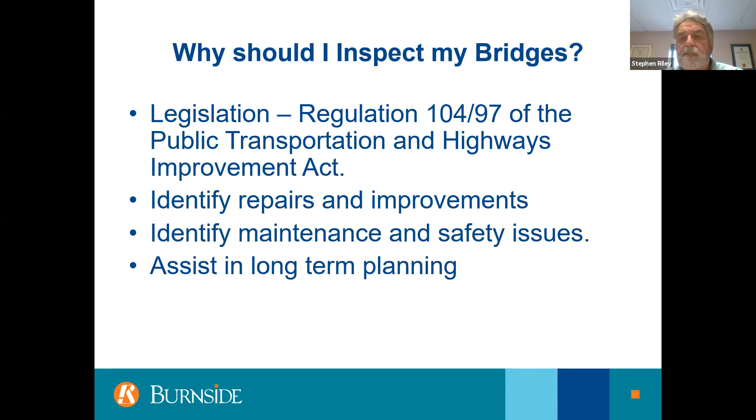So in terms of why you should inspect your bridges, first and foremost, the legislation, Regulation 104/97, says you have to. What it does is allow you to identify repairs and the need for any improvements you might be able to see. It identifies maintenance needs and critical safety issues, and it can assist you in long-term planning.

I often think about it in terms of when you buy a piece of equipment like a snowplow or a dump truck—how much money do you spend on that particular asset? It might cost you $200,000 or $300,000 for the truck, and then every week you're maintaining it: washing it, fueling it, doing oil changes, brakes, all sorts of maintenance. But then you have $30 million of bridge and culvert infrastructure, and how much money do you spend on maintenance on those assets? Most municipalities have a lot more value of bridge assets than they're probably aware of.

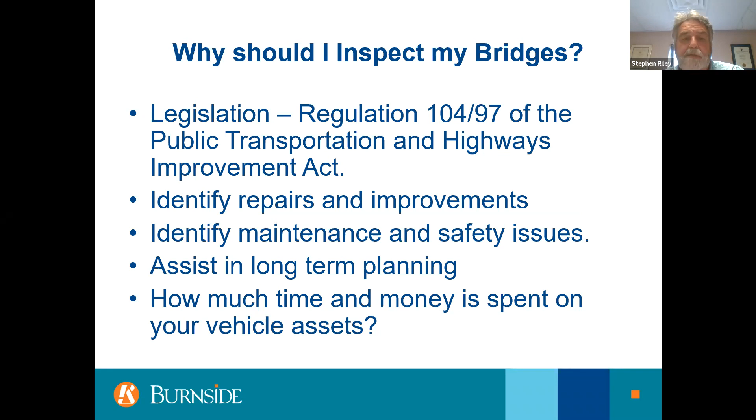So there's a regulation—everybody quick, hurry, read that. Just kidding. The most important part says that every bridge in the province has to be inspected for safety and integrity once every 2 calendar years. So that's kind of the driving force behind why you do it, and then it's about what else you can get out of this.

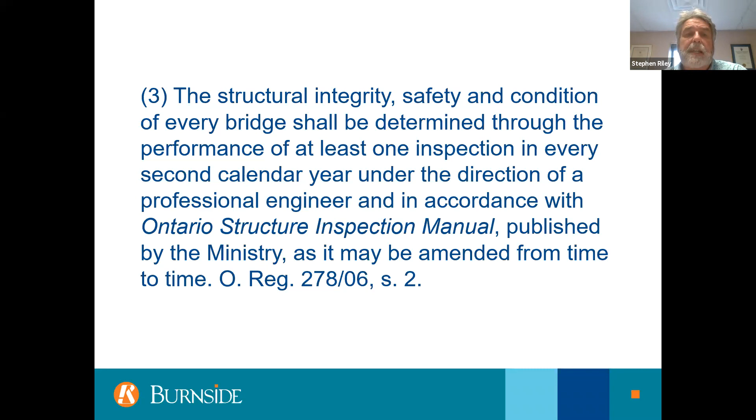So what formats are there? Well, if you're with the MTO, they have their bridge management system, BMS, and that's fundamentally the basis for a lot of other systems. It's a severity and extent criteria.

So what that means is that you look at a particular component and you see how severe certain defects might be. It might be light rust, for example. It might mean heavy pitting. It might mean holes, perforations in the steel. So there's a severity of a defect, and then it's to what extent on the component this defect is impacting.

There's also discussions in there of performance issues on your bridge. It might take the form of, does your bridge vibrate too much? Is there ongoing settlement? Is there other movement on the bridge that you need to be aware of? And then of course, there's an issue about maintenance, and there's a number of items described as maintenance, and you can try to take those up within a short period of time.

The OSIM is the Ontario Structure Inspection Manual, and that forms the backbone of most bridge inspections. It's based off of the MTO BMS. It's again the severity and extent criteria. Sometimes we see other municipal driven or consultant driven formats.

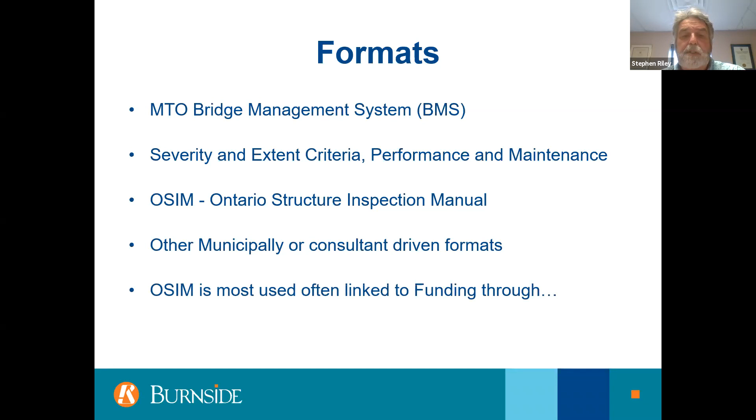Depends on the size of the municipality. They may have their own format, and also certain consultants have hybridized and simplified some of the OSIM information for some of their clients. Now, OSIM is the most often used system that's linked to funding, and this is often through the BCI or the Bridge Condition Index.

So when we speak about the Bridge Condition Index, we think about it that the conditions for a component of the bridge are either excellent, good, fair, or poor. And the BCI, you can do it by component, but the way I try to envision it is...

If you have a blank wall representing a component, if all of the wall is perfectly good or excellent shape, then you get a high BCI. As you start to have a defect that might be, say, the size of a window, you might drop to good or fair condition, and then your BCI goes down as the size of the window gets larger. If the size of the window gets to be the size of a door, you're down into fair or poor, and your BCI declines respectively. So the larger the defect as a percentage of the component, the lower your BCI score goes.

Now, it's weighted by the relative value of the component. So you don't want everything weighted equally. If you have a damaged handrail on a bridge, for example, and its BCI is very low, you don't want that driving the whole score for the bridge. So it's a very lowly ranked weight in the BCI.

But if that same bridge had problems in low BCI based on a girder, for example, well, it's certainly a much more involved repair or replacement process. And so its weight in the overall calculation of the BCI is much higher.

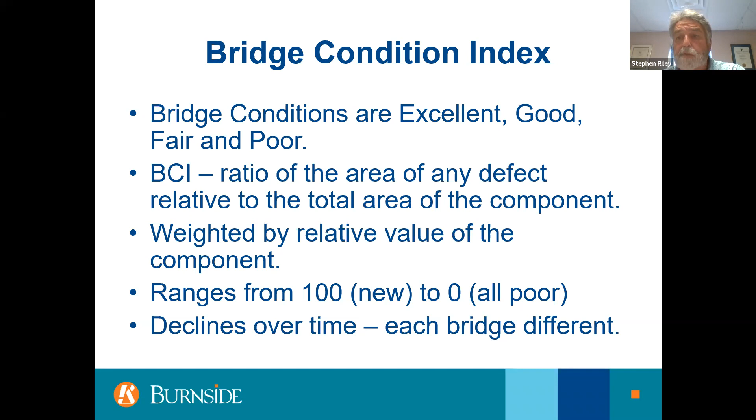So what do we do with the BCI once we get it? Well, first of all, it's important to know that the OSIM inspections provide you all the information to calculate the BCI. And so once you have your system of bridges inspected, you'll be able to prioritize your bridges - the lowest BCI might need the most attention, and of course the highest needs the least attention.

And then I have to stress this many times: it's not a single point where you can just look at your BCI and say, I'm going to do project A first. This is only one input into the planning decision that might go into a bridge rehabilitation or replacement, but it's a good place to start.

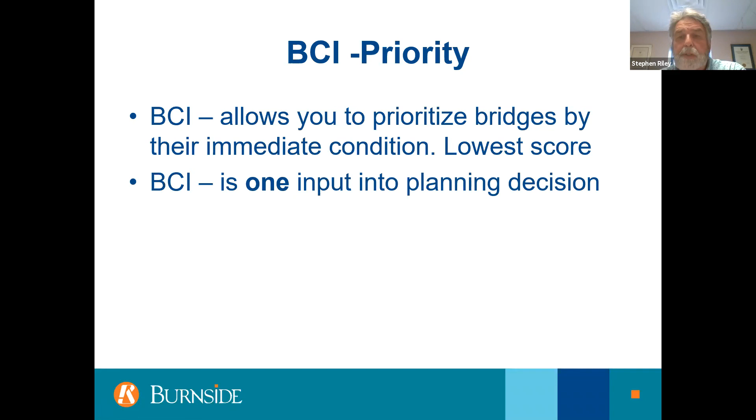The other things you have to think about are the traffic volume, the road geometry, load limits, future growth, and history of accidents. All these things have to be considered in addition to bridge priority BCI number. For example, if your lowest BCI bridge is on a very low volume road, you might want to prioritize a bridge that has a higher BCI for replacement if it was to be on a road that has more traffic, or potentially more traffic due to future development.

BCI is important, but it is only one input into the planning decisions. This comes down to things such as functional versus structural adequacy. The BCI tells us about structural adequacy, but sometimes, as we recently did, we replaced what was a single lane bridge due to construction of a manufacturing facility that was going to drive a lot more traffic. A lot of people in the local area started using that road, and that bridge needed to be replaced even though it was probably 10th or 12th on the list in terms of BCI. It was taken to number one because it was functionally inadequate rather than structurally inadequate. Again, BCI is just one priority in our planning decisions, and I always want to stress that point.

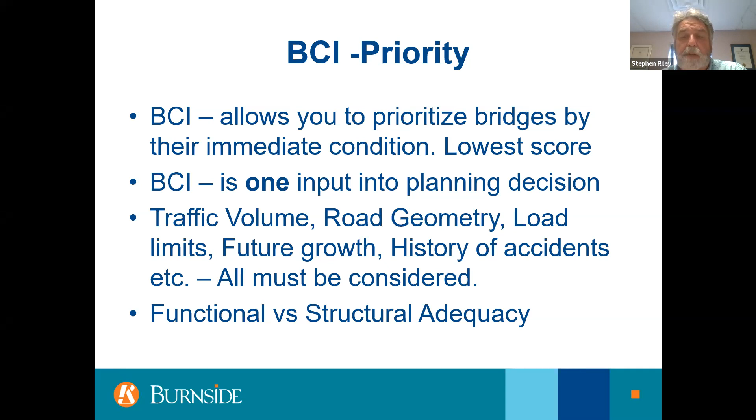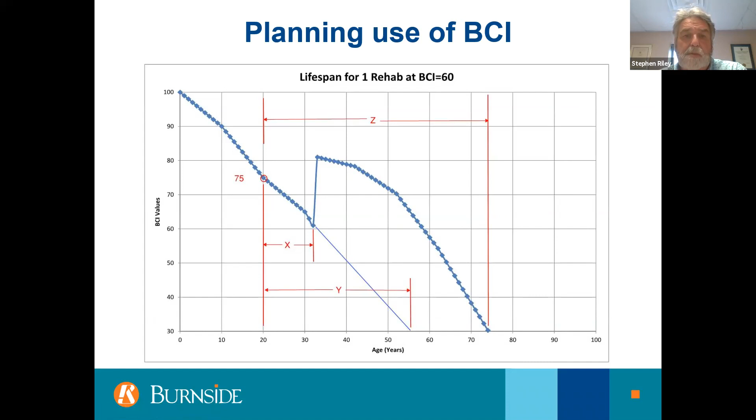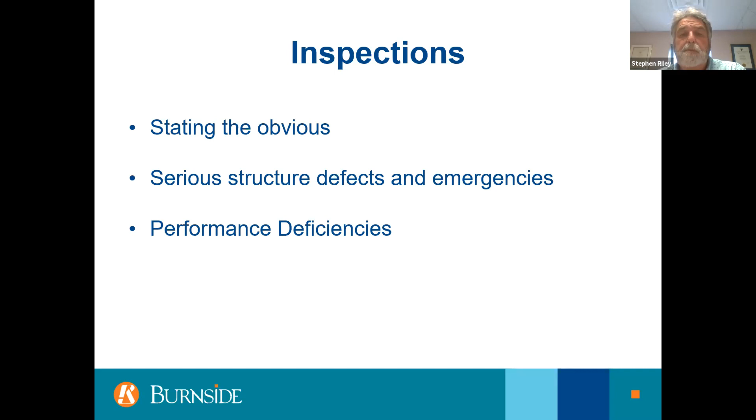So when we get into inspections themselves, what are we looking for? There will be things that are clearly obvious, serious structural defects and potential emergencies that might require the road to be closed, and I've closed several bridges due to this. We might find performance deficiencies where bridges aren't able to expand and contract, or react to temperatures as they're supposed to, where their movement is restricted. We might identify repair or replacement needs for components or the bridge in its entirety. Then we come to maintenance, whether we can do this in-house or go out to contract.

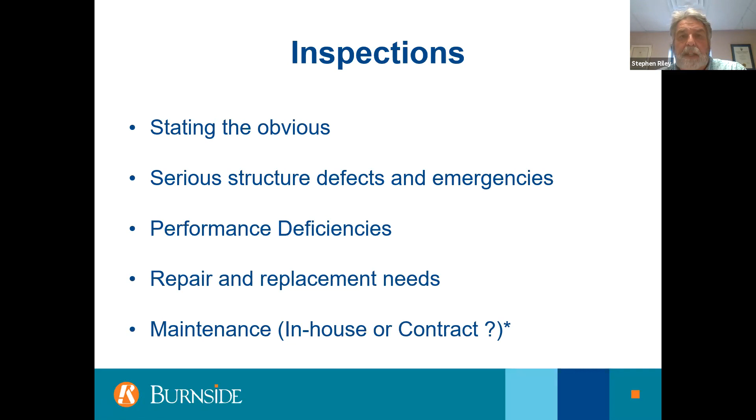Now I'm going to take a sideline here and talk about that, because it's come up recently with some of our clients who wanted to develop a system where their own operations folks would go through and do all of their bridge maintenance that's identified in their OSIM reports.

We were hired to look at their existing OSIM reports that we didn't do, and just go through the maintenance needs that have been identified. Then we sat down with their operational staff and asked which of these things they could do. It was kind of an eye-opener for the maintenance staff and operations folks, because a lot of the things flagged in some OSIM reports are beyond the capabilities of most municipalities.

We have to remember this was originally created by the MTO. So when you start to look at the listings of things identified as maintenance in a typical OSIM form, you start to eliminate some of them pretty quickly, like lift and swing bridge maintenance, which has a very limited application.

Bridge cleaning, you can certainly do that with your own staff. And if you walk away today with anything, you're going to hear me say the word clean your bridges a million times. Handrail maintenance—you may be able to replace tube rails with your own staff.

Most municipalities are not in the business of painting their steel structures, nor doing deck joint repair other than flushing them out. Very few people are capable of bearing maintenance, structural steel repairs, or concrete repairs.

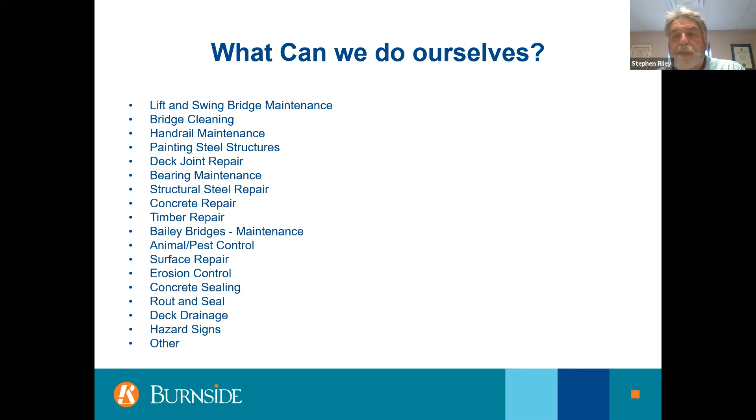When we went through that list with this particular municipality—a medium-sized city in the province—they realized they really were not cut out to do a lot of what is described in OSIM as maintenance. So they had to recalibrate how they were going to do that, what they could do in-house, and decide what they had to contract out.

So when we get back to the inspections themselves, you're going to see some photographs here that I've collected through the years of things that you just shake your head at when you see them. I don't use any municipal names, just in case anybody is listening. But this is one of those pictures that falls into the category of stating the obvious.

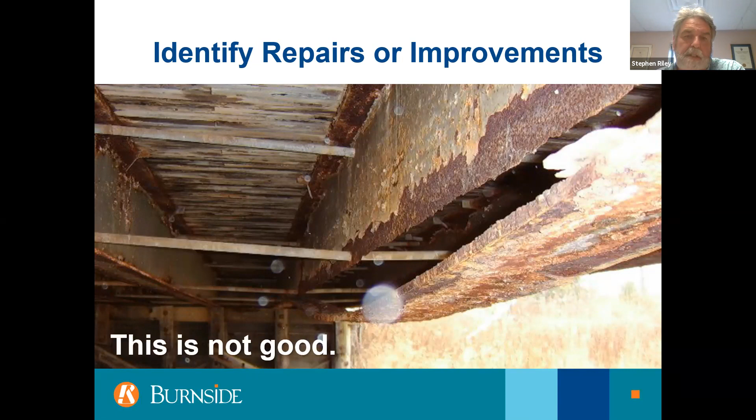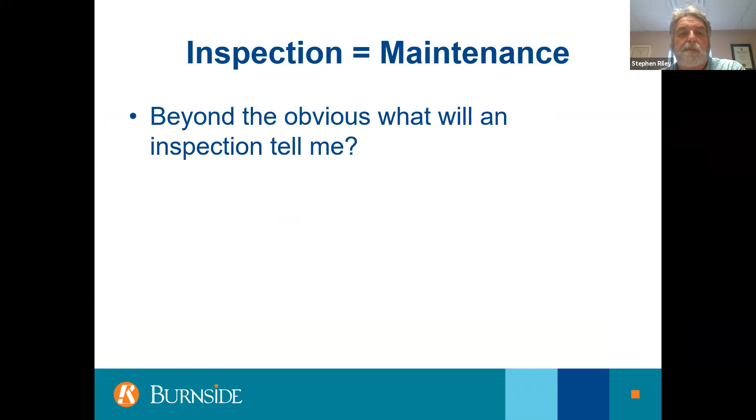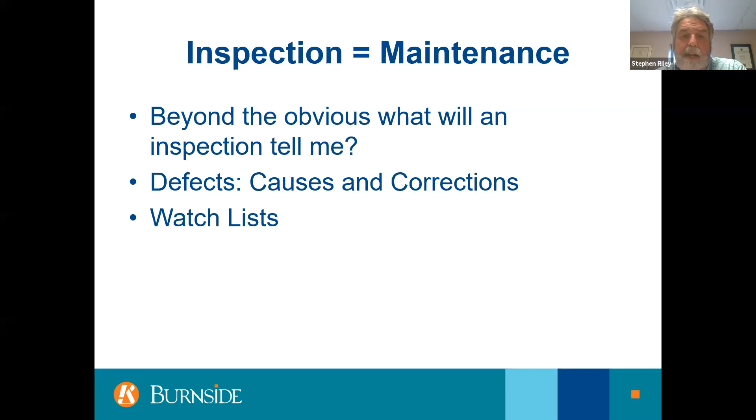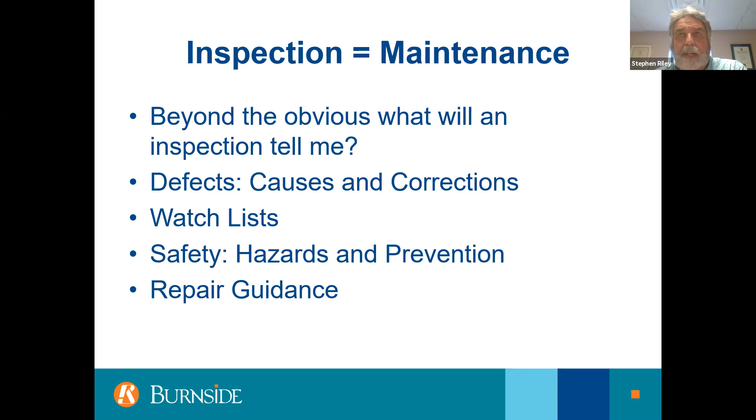So beyond the obvious—those kinds of obvious defects where you have large holes or major structural concerns—what else can this tell us? Well, we can find some discussion about what causes some of the defects and what we can do to correct them in the short term. We can create watch lists, things to keep an eye on to see whether they're getting worse, and if so, how quickly. We can identify immediate safety hazards and take steps to prevent certain issues, and we'll touch on that. We can also start to think about repair guidance, where you might engage someone like myself or other consultants to give guidance on how to repair or do work on your bridges.

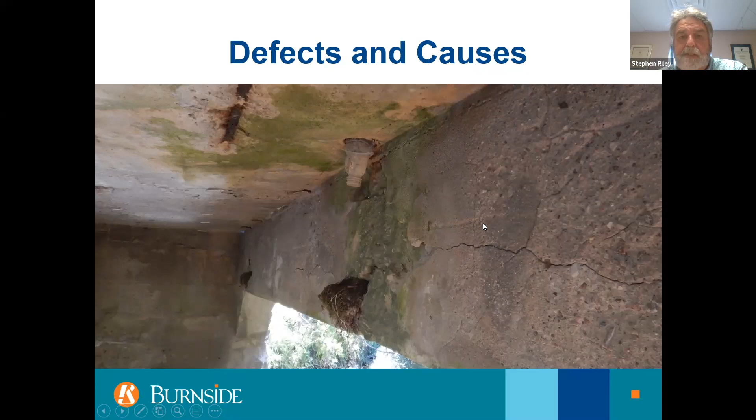And when you have a situation like this, where you've also got low cover to your reinforcing steel, you start to get damage to your soffit and damage to your T-beam concrete beam on the inside face. This is so common—I see this thousands of times.

Just about every concrete T-beam has the same problems to some extent: soffit and beam damage. The solution here is you can extend the drain, take a steel spout and extend it down below the bottom of the girder so that the drainage water cannot get on your concrete components. This one's probably a little late for that, but if you catch it, you can do this.

And it's not just always the case with T-beams. It's any kind of structure that has no drain system that gets below the closest beam.

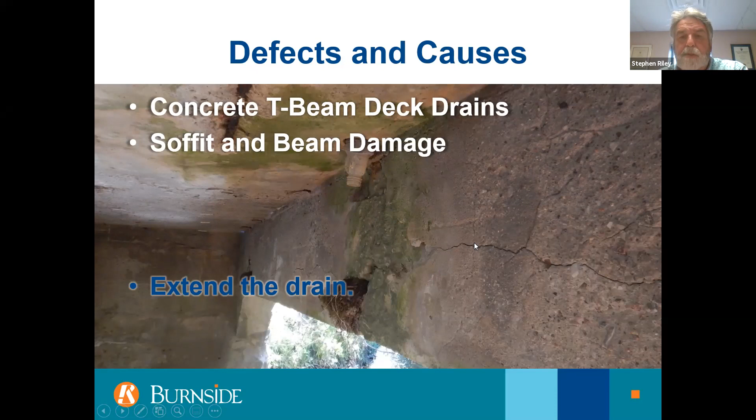This is an old steel truss bridge, and obviously there's a buildup of sand and debris over time. A lot of these things were built with angles for tension members that almost act like a cup to hold all this stuff, the sand and debris built up. And of course, if there's sand and salt, you get water and salt in there, you're going to have corrosion of the gusset plates, corrosion of the tension anchors, corrosion of the inside girders, just a lot of corrosion that comes along with having this material build up on your bridge.

I didn't find the picture, but I did come across a steel truss a few years ago that had about a 1.5 inch diameter, I'll call it almost a tree, a bush growing in it. It certainly didn't pop up overnight, it took some time for that to grow. And it was obviously clear that they were not maintaining that bridge.

This particular bridge had to be closed on an emergency basis, and it was immediately repaired so that it could be open for school buses and such. Then it was immediately planned for replacement. Keep in mind that happened in about 1996 that we built the new bridge there. Sorry for the old picture, but it tells the story. In 1996, this bridge ultimately was replaced.

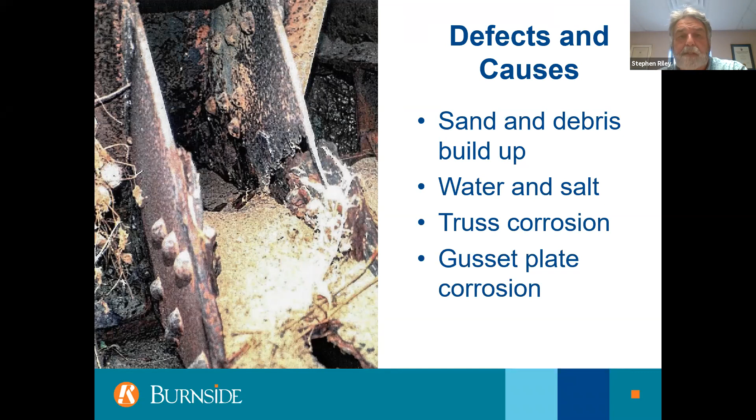This bridge is the same vintage as the one you just saw, but in this municipality, every single year the road superintendent went out and washed the bridge. He usually used the fire department, so I don't know whether everybody can do that or not. And later started hiring a bridge contractor to flush the bridges. But they went out and washed their bridge every single year. This bridge was built around the same time as the one we just saw a picture of.

And I can tell you that this bridge was replaced in 2016. So an additional 20 years of service life was gained simply by washing this bridge. When this bridge was replaced, its BCI was still almost 60. It was basically that they had more traffic volume on the road, and the bridge was becoming functionally inadequate as much as it was structurally inadequate. Rather than spending money on repairs, they elected to replace it. But that's 20 extra years of service life just by washing the bridge.

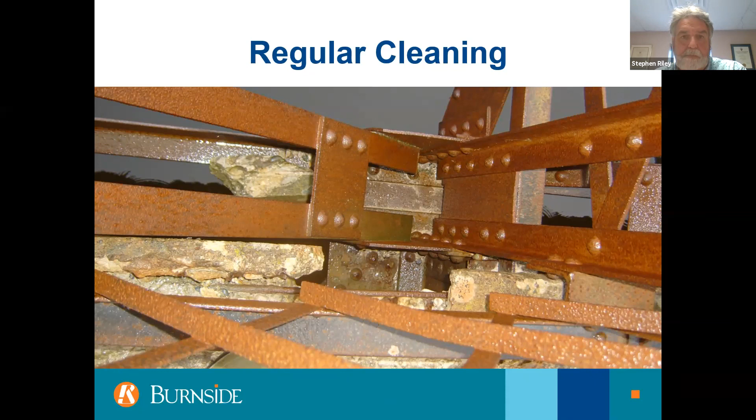Another common situation is expansion joints. The idea of expansion joints is exactly as it is, expanding. As the weather gets hot, the bridge wants to get longer, it wants to move back and forth with the joint. When the joint is full of debris like this, sand and debris, it basically can't move, and now it's adding stresses into the bridge that it wasn't designed for. This stuff, if it stays for too long, becomes almost like concrete, and so it stops the bridge from moving as intended.

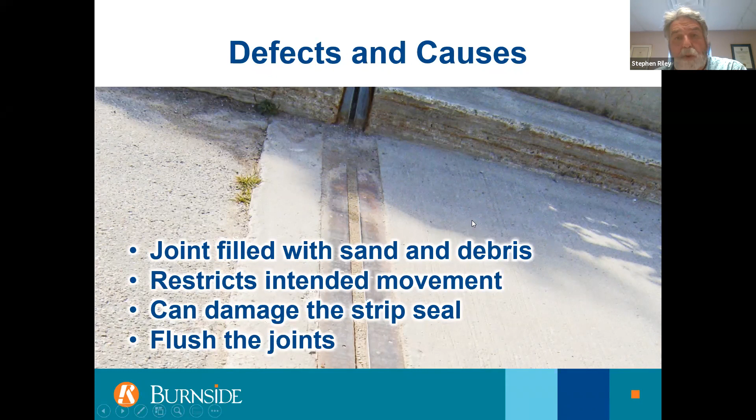You need to make sure you're cleaning this, because a lot of these joints have a rubber seal in them, and you'll damage the seal, which can cause leaking. So again, I'm back to my cleaning discussion. You need to flush those joints and do it every year. Again, it buys you service life, and it's easy to do.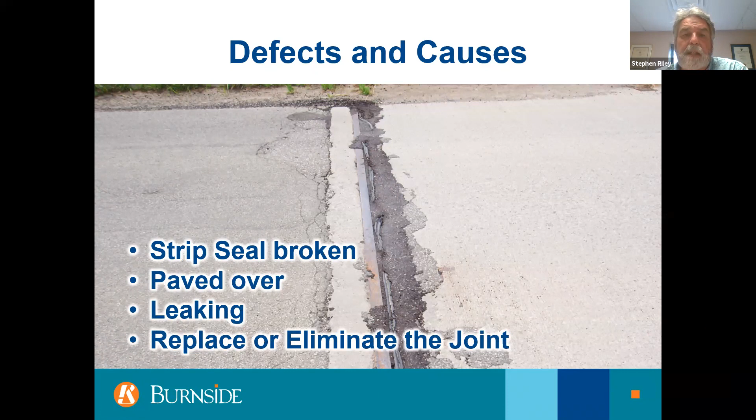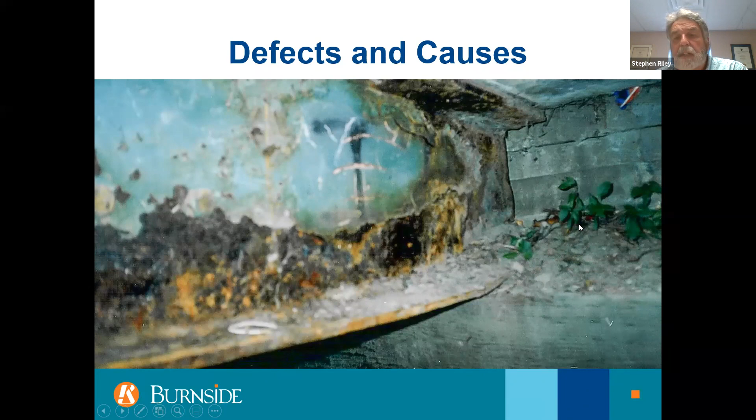Now, if you go underneath the bridge, you'll see something like this, where the joint has been leaking, and there's a lot of sand and debris that builds up on the beam seat and on the bottom flange of the girders. Of course, along with it comes the salt and water, and you start to get corrosion along here. You can see some greenery that has taken root there, because the water is getting watered every time it rains, and there's all that dirt to grow in. This was not a planter that was planned for this location.

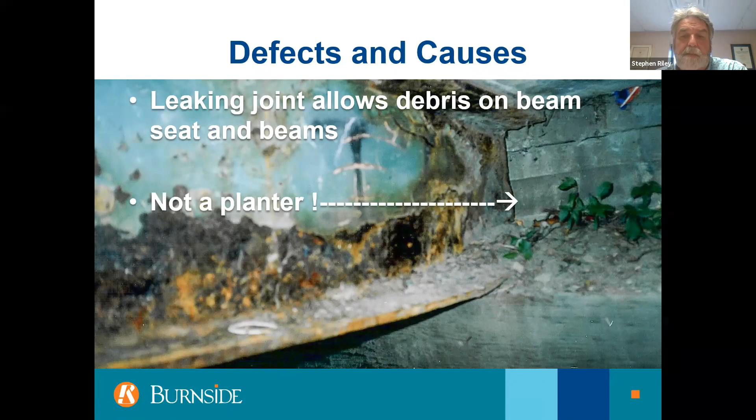So again, here's another place where you can clean the beam seats, clean those areas, don't let material build up. This is something easy that you can do with your own staff.

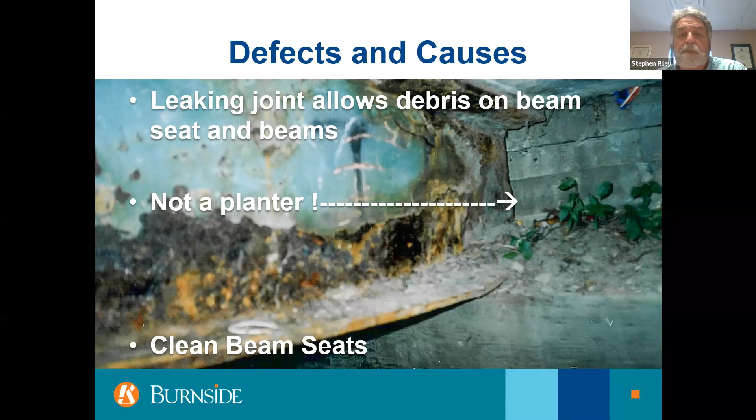When we talk about watch lists, hazards, and prevention, in this case we want to find areas that we can monitor and see how they're performing over time. We can consider areas for future construction or maintenance, start to identify them in advance, and take action before you have a problem.

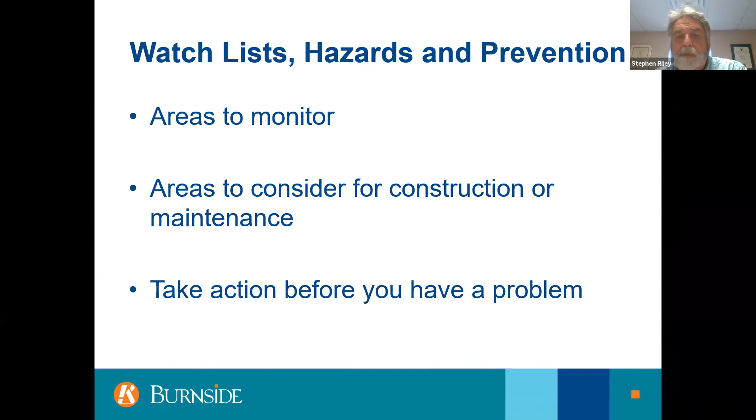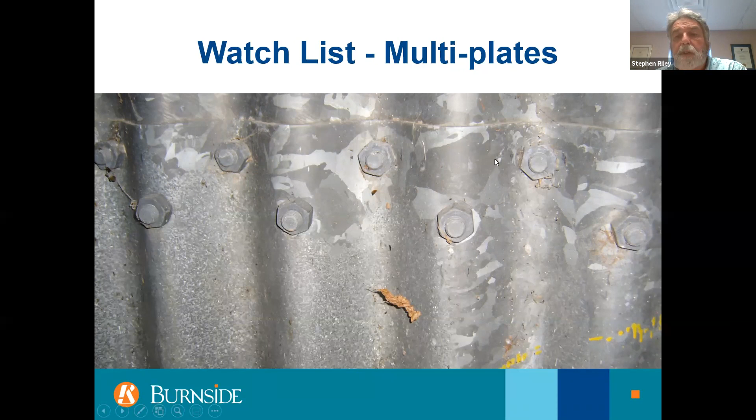So one of my favorites is multiplate pipes. Multiplate pipes are pretty common all through the province, and there was a time where many pipe arches, CSPAs, were put in. There's always, I can almost tell you in advance what the problem is going to be when I walk inside. I have a mantra when I send out my staff to monitor construction of these or inspection.

There's two things I tell them. One is the bolt hole closest to the visible edge should be in the valley of the corrugation. So you can see here, there's the visible edge, there's the bolt closest. Further away are the bolts that are on the crest of the corrugation. Now, this would be true whether you're looking at it from the inside or the outside.

The other thing I tell people is, if it's going together easy, it's going together wrong. The way these are installed typically is you have a crane holding up the panel, and one end rests on the outside of the lower plate that's already in place, so you can just tighten the bolts up. But the way the plates are manufactured, on the other side of the culvert, to have this arrangement, you have to have the plate on the inside of the lower plate. That means you have to push it and hold it in place, so you need an extra person. So again, if it's going together easy, it's going together wrong.

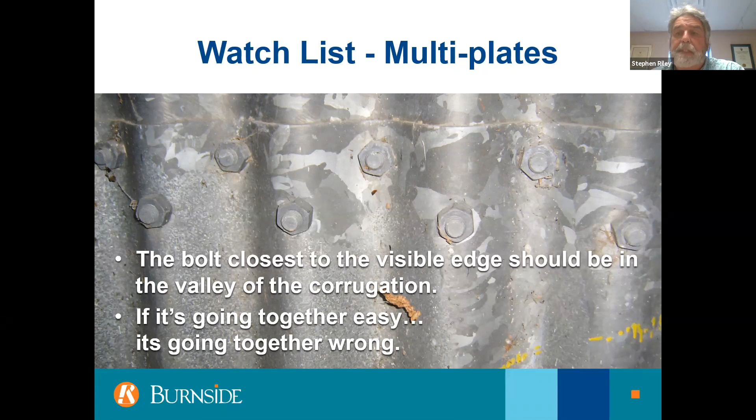They found after some time that it's the way the plates are arranged, it's a weaker design in this factor. It also depends so much on the quality of the backfill and how well it's compacted. You'll notice these things are called soil steel structures - the soil is a critical component, and the backfilling of these structures is very, very critical. It's more critical the sharper your radius. So a round pipe isn't as much of a concern as an ellipse, which isn't as much concern as a pipe arch, which is where the majority of these are - where you have the high radiuses, poor compaction, and you get this kind of cracking. It's very common, and again, the shape of the structure will dictate this. The pipe arches are by far the worst.

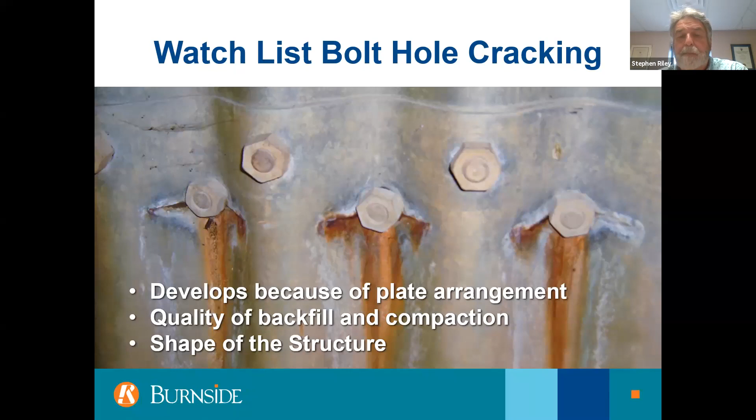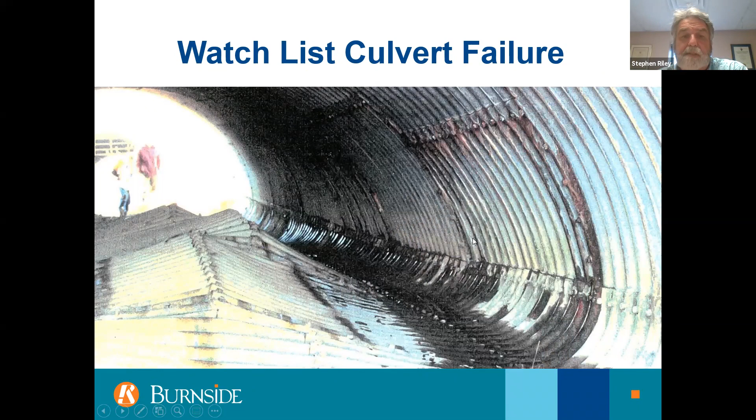Here's an example of a culvert failure that is a bit of everything. There was bolt hole cracking, there were no head walls at either end, and the water was going underneath the culvert, washing out all the support, and it just buckled right up like this. Of course, it had to be replaced.

Sometimes if you catch it, you can do a temporary repair. Here's a situation where there was some reinforcing steel that was welded alongside each of those cracks to sort of replicate the steel that was missing. It's a temporary repair, but this particular one bought that municipality 20 more years of service life. So rather than spend the money right away, they were able to extend the life of that culvert.

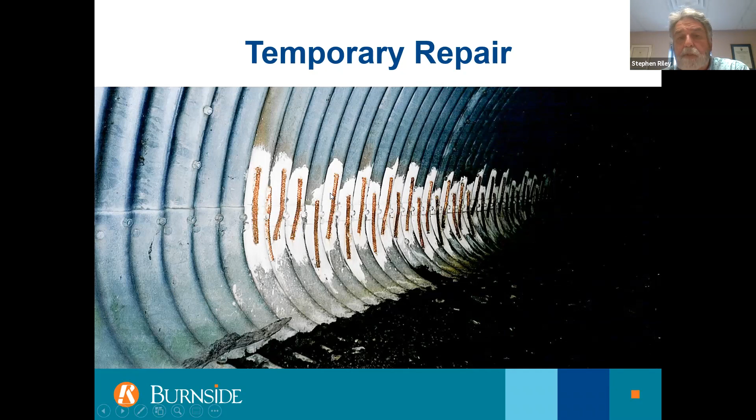Now, it certainly has safety concerns - you're welding in an enclosed space with galvanizing. It takes specialized equipment and such to do it, but this is a temporary repair that's fairly inexpensive that can buy you some time. If the structure's under a lot of fill, it's going to cost a lot of money to replace.

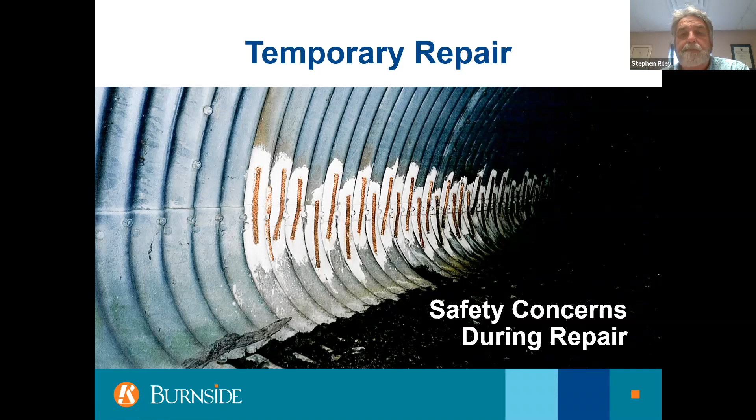Other things to watch for are ever-growing potholes in places. Here you have a pothole on the approach to a bridge that's requiring constant maintenance. The pothole grows over time. Every spring your road superintendent comes in and says this pothole's getting bigger and bigger. So what might be happening?

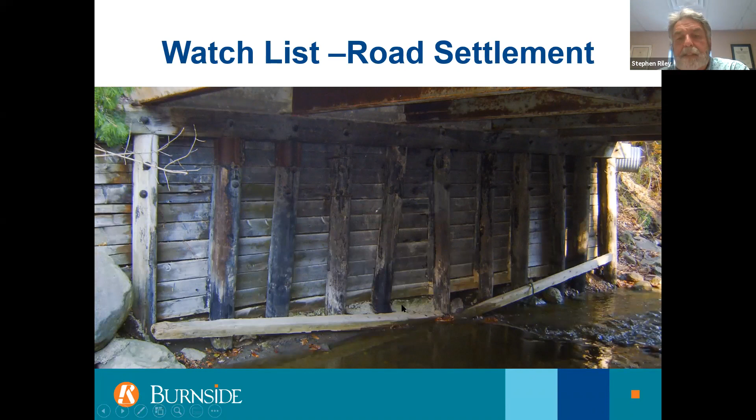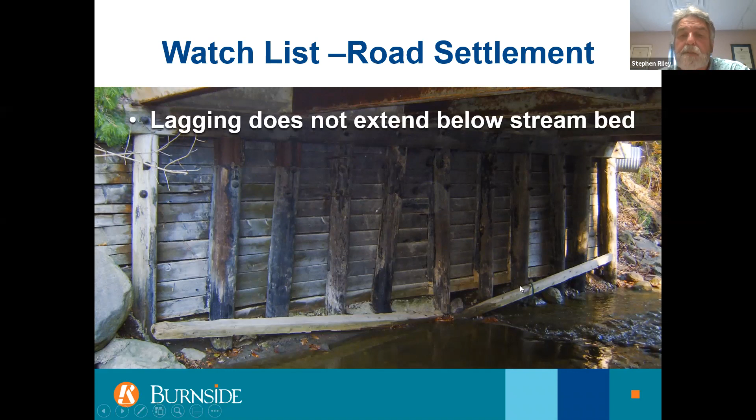In this particular case, it was a structure founded on a pile and lagging foundation system, and the lagging doesn't go below the stream bed. So every year, when the water is rushing through there, it's drawing material out from underneath the lagging and taking it away. And of course, if it goes from the bottom, it sinks in the top.

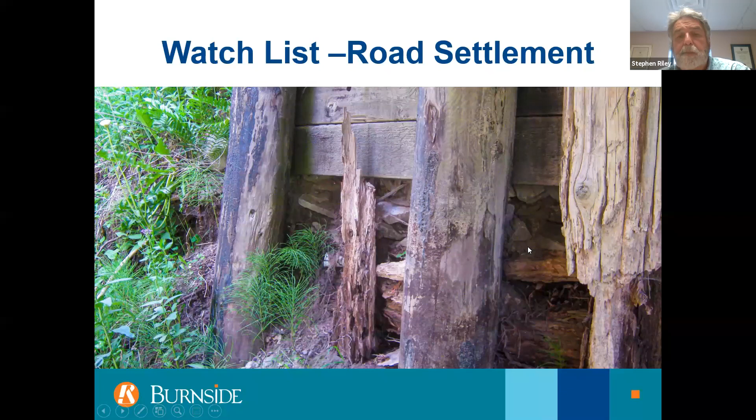But here you can see again, stream water is taking away the granular material. Over time, they've tried filling it with larger stones. There's another photo showing where they threw a road sign into the hole at one point. With a gravel road it's less obvious, but this kind of thing should come out in your bridge inspection.

In this case, it was time to rebuild that abutment.

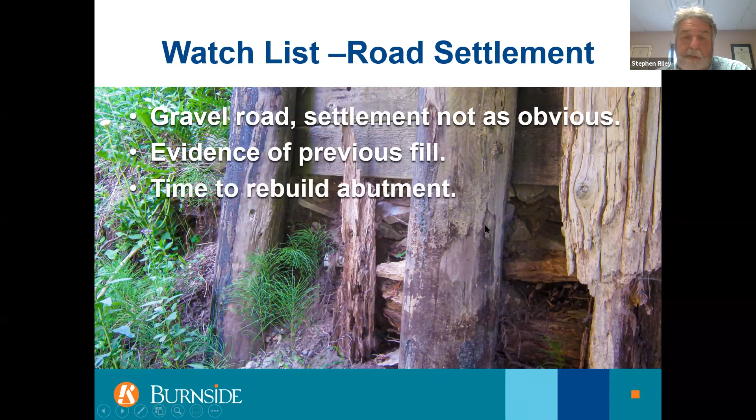Another thing is watching your culverts or structures for buildup of debris in the stream. Obviously this is a problem because it affects the hydraulics, and if you had a really big storm, you're at a greater risk of a complete washout if your structure's partially or fully obstructed. So you need to make sure you can clear that, and this is something you could likely do with your own staff rather than contract it out.

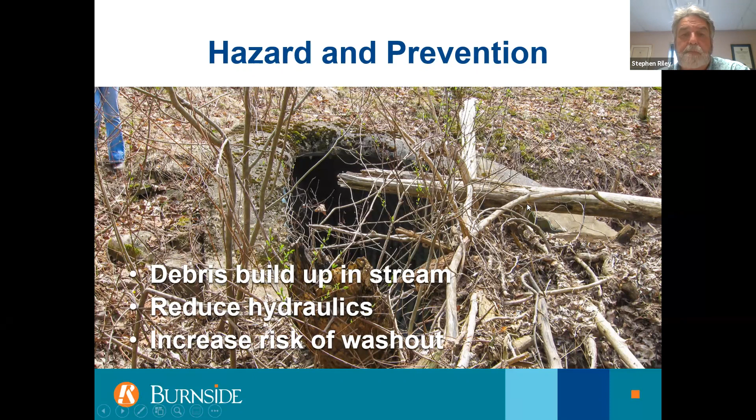Here's a common situation on a granular road where every year they've graded the road, and graded the road, and the road surface is up here now. This concrete is a barrier that used to be about 1.5 feet above the top of the bridge deck, and they just kept grading it and grading it.

They didn't really realize they were burying the barrier system until we got out there and looked at it and said, what is your barrier system? It's under the ground, it's under the road. So we recommended they don't grade anymore.

The best way to fix that is to remove the fill and pave the bridge and the approaches so you're not likely to grade over top of it. This is pretty common, and it happens so gradually that nobody really notices they're filling in parts of their barrier system. Then there are places where it is very noticeable, where someone's built up the road approach with sandbags because they see themselves doing what they shouldn't be doing. But this is a case where it is sometimes noticed and they just do it anyway.

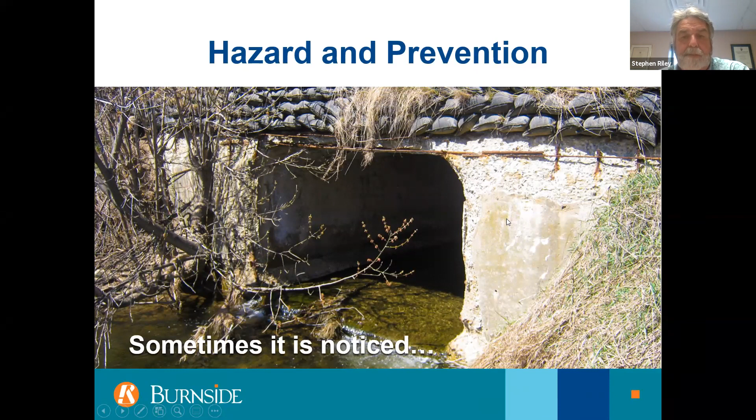This is an example of a real safety hazard. In this case, the guide rail is not connected to the structure. When you connect a guide rail to a structure, you're making a transition from a flexible guide rail system that in normal applications can deflect about a meter, which is what they expect.

With most bridges, as you get closer to the bridge, they add more posts. What they're doing is adding stiffness to that assembly, making it less and less able to deflect, because the concrete isn't going to deflect at all. So they want to transition from a flexible system on the approach that guides you back onto the road, making it stiffer as you come to the bridge and connect it. The idea is to slowly, gradually increase the stiffness so it won't deflect.

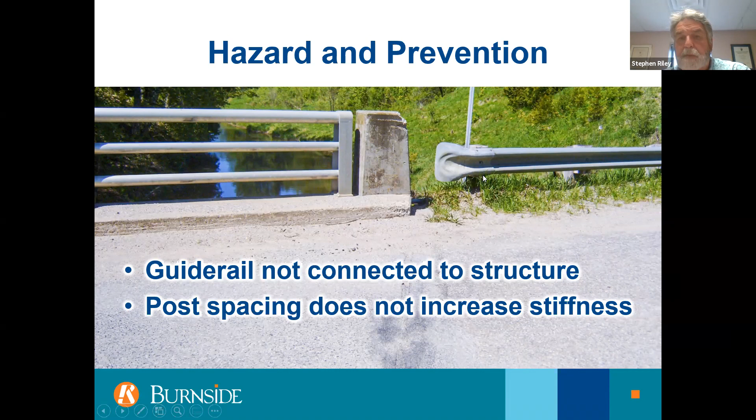In this particular application, you have a system that can deflect up to a meter. So if you hit this and you're a meter off the road, you're going to hit this post. In this case, you'd almost rather take your chances going down the hill into the stream than hitting this post. So this is a very, very significant hazard.

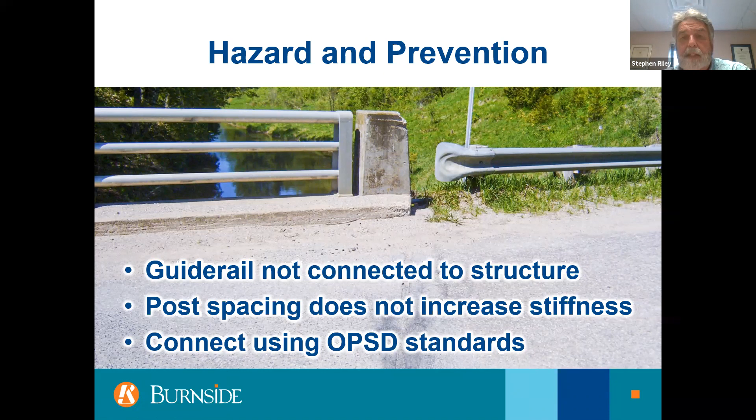There are OPSD standards that allow you to connect to existing barriers with drilling and ways to connect it, and standards for the approaches. This is one of the things we flag as a hazard on many of our bridges. This is worse, I think, than not having a guide rail at all. And like I said, it's a lot more common than you think when you drive around the province.

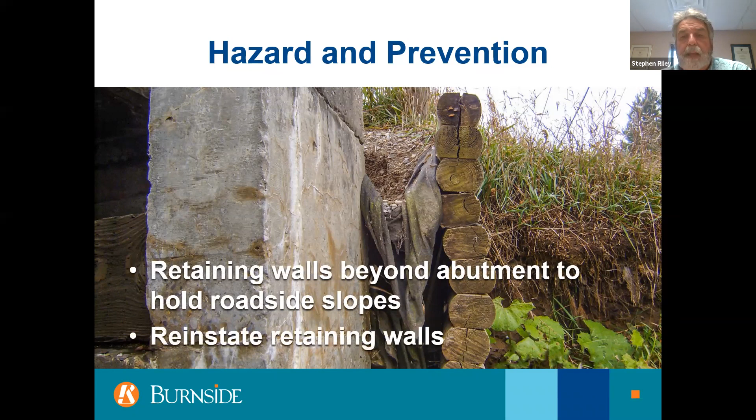Here's an example of a makeshift retaining wall that was put against an abutment that was designed too short by engineers - it didn't accommodate the road, so they had to build something, and it's obviously falling apart. This had to be all reinstated. What happened here is that it fell away, started drawing material, and became a hazard for bicycles, people walking, and vehicles, as the retaining wall failure led to erosion and wheel magnets, I call them.

So we had to reinstate the walls and the roadway, and then control the drainage, because this can also happen at other structures where you don't have any curbs beyond the end of the structure, and the water just goes around the edge of the barrier wall and erodes your slope in the same location. So it's about controlling the drainage - you may have to go out to some of your structures with this kind of erosion and add a little bit of curbing that'll take the drainage further away from the bridge. Again, that's not a big fix, but it can save a lot of problems down the road.

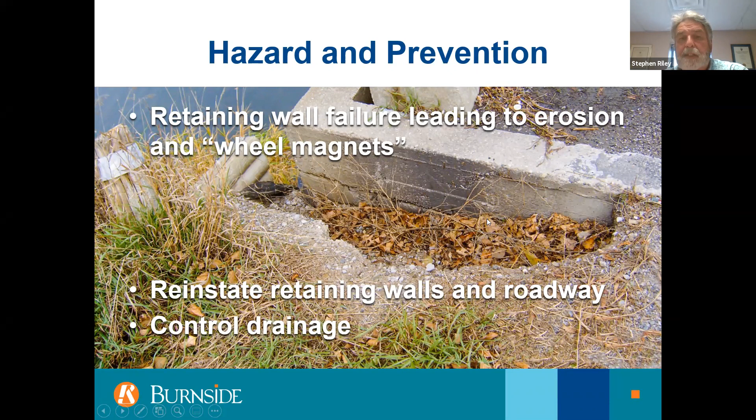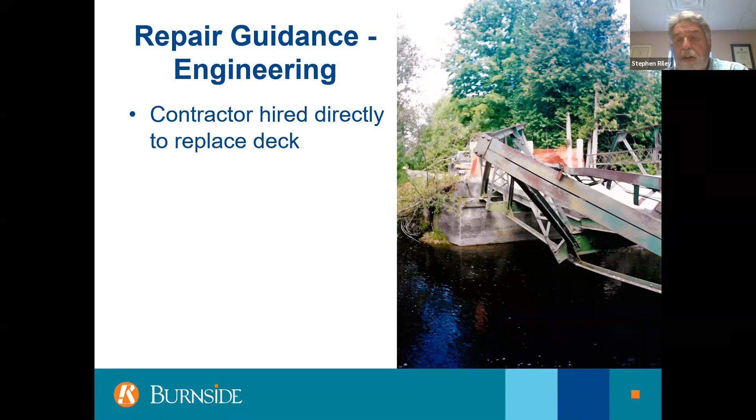And so they did - they hired a contractor, and I know the contractor, and he did a great job putting a nice, thick, heavy concrete deck on it. The problem is, with the heavier deck, you're using up the capacity of the truss. The truss has a fixed amount of load it can carry, and you want to share that with as much live load - trucks and vehicles - and the lowest amount of dead load.

In this case, the contractor put on a nice, heavy, thick deck. When the township was going to do road work beyond the bridge, they were bringing a large load of granular material over the bridge to dump on the other side. As they came close to one end, they started to raise the truck bed, increasing the load even more on the back axle, and all of a sudden the truss blew out instantaneously and was ruined.

Our advice in advance of doing that would be to do a bridge evaluation and determine the capacity of that truss. Can it be repaired with a concrete deck? Would you be better off in this environment with a timber deck that's lighter weight, so you can carry more load? Doing that engineering up front is going to save you money.

Because after this happened, I got a call, and we went out and redesigned a new superstructure. So they not only spent - going back a few years - but they spent a couple hundred thousand dollars to replace this deck, and then they had to redo the whole thing. So a $10,000 evaluation would have saved them hundreds of thousands of dollars.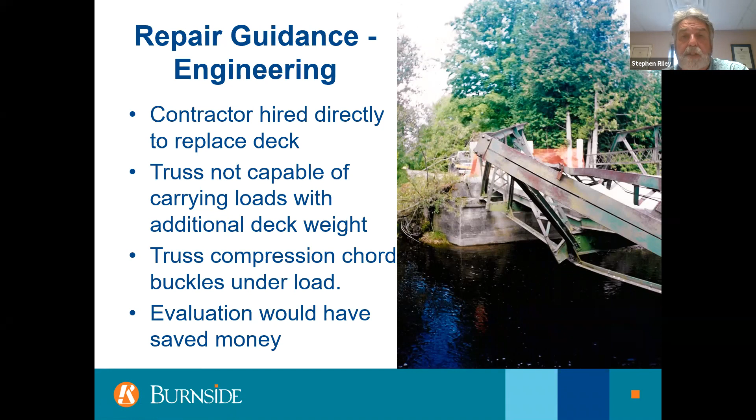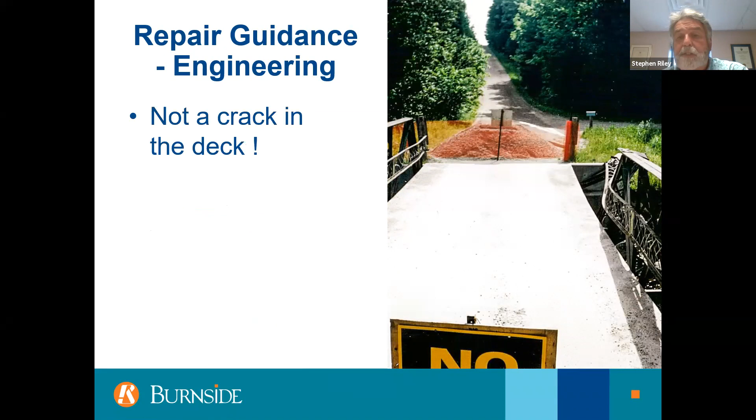So get some engineering assistance before you do that. This is the deck again, and there wasn't a crack in the concrete deck at all - the contractor did a really nice job of something that didn't work.

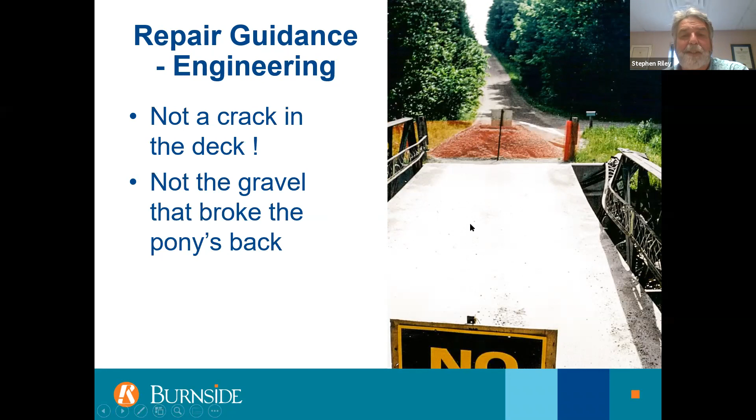This picture shows this lump of gravel here, and people ask me, is that the gravel the township was putting on when this buckled? The answer is no. This gravel was placed there because this gentleman who owns this house continued to use the bridge after it had buckled, so we had to prevent him from doing that.

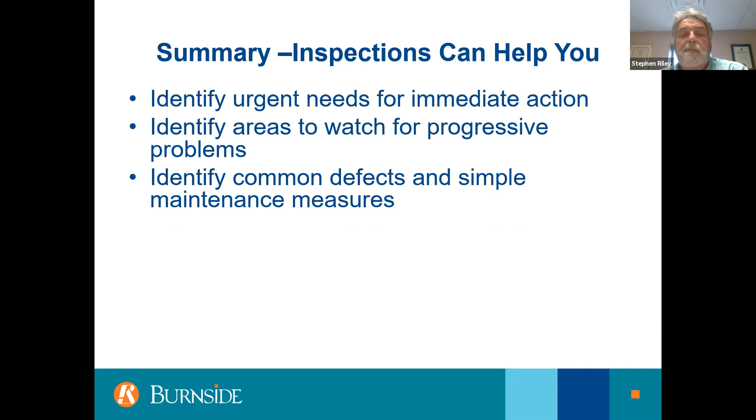So in summary, what I want to reiterate is, when you do your inspections, you can identify urgent needs for immediate action. You can identify areas to watch for progressive problems. You can identify common defects and simple maintenance measures that you can take with your own staff. And you can identify hazards, like that guide rail, and take proactive action to repair that before you have an accident. You can save money and extend the service life of your structures.

A clear example of that was those two truss pictures - one that was never washed, and one that was washed every year, and bought another 20 years of service life out of that.

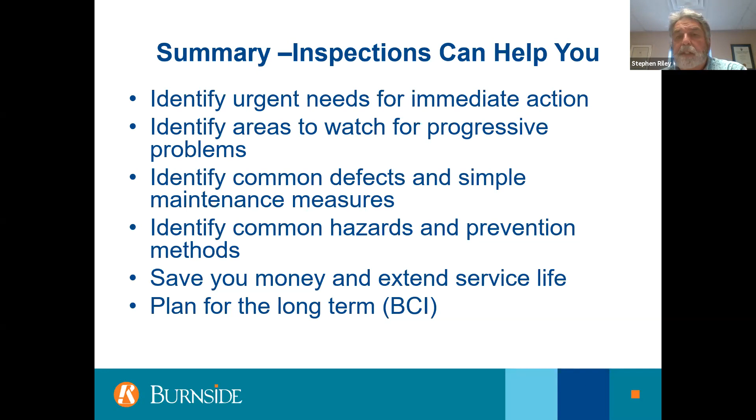And then, of course, you take all the information you get from your bridge inspection, you have your BCIs, and you start to be able to plan for the long term. You can plug that data into your asset management system, and you can start to project where you're going to have the need for more money down the road, and try to smooth out the peaks and valleys of that demand. So that's kind of all I had for today.